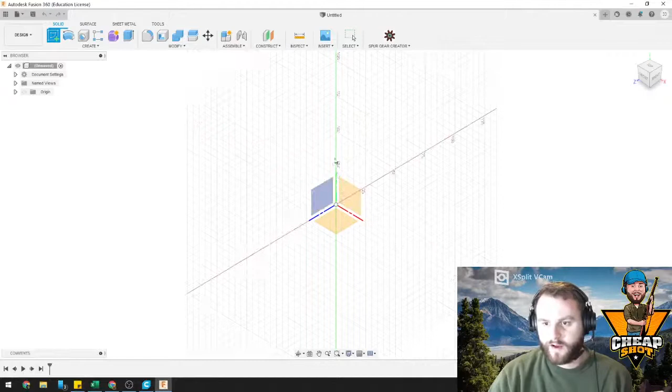Everything kind of works here in this sketch plane. So let's do something real simple. Let's say we want to make a cotter pin. We're always going to start with create a sketch, and then select what plane we want to do it on. We can do it on a vertical plane or a horizontal plane. We'll just do this face right here.

The tool we're going to use for making this cotter pin, I think we'll use the Revolve tool. There's a couple different ways we can do it, so we'll show two. The first way is the revolve way. Let's pretend like we're looking at it sliced in half. We can come up here and basically revolve it around this green line, sketching a plane and bringing it all the way around.

How that would work is we can come here at the bottom. Let's say I want the head to be 24 millimeters thick. For this one we need 12, because we're going to go around to the other side. And we'll say we want it 5 millimeters thick. We can do this using a square tool. There's a couple different ways we can do it.

How big do we want the shaft? We can have 12 millimeters back in. Let's say we want the shaft 5 millimeters thick. Remember we want to go minus 2.5. We want to be a little bit bigger than that, so let's say it's going to be 10.

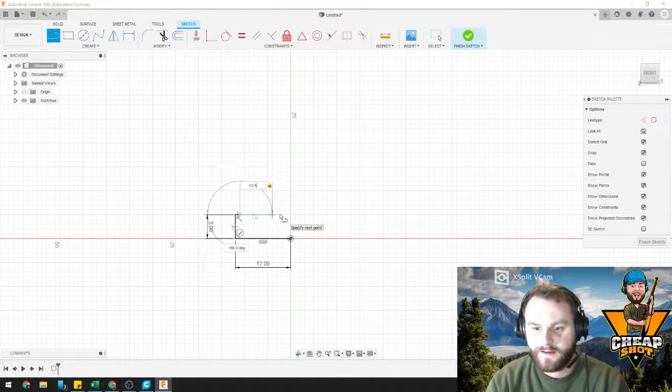And then we can bring up our total length of how we want our shaft to be. We can come back in — I don't know what that is, must be an update — and we can come back in and connect everything back up again.

So then here we have this L shape. What do we do with this L shape? We're going to come over here to create. We are going to do a — where's it at? Revolve, can't find it... Revolve. And it's going to have us select a profile. We already selected that, so it's enabled. If it didn't, we could select up here to profile and select that shape.

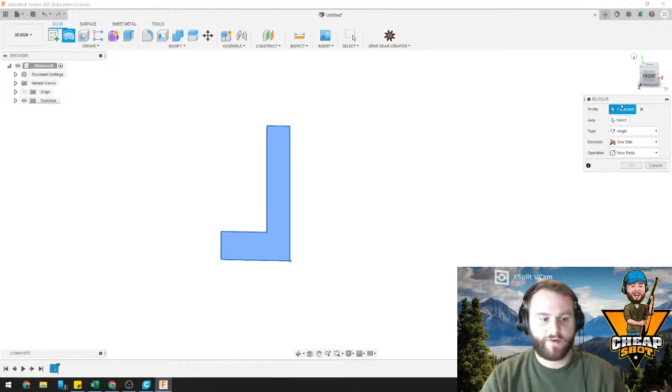But it's going to be the axis of which we want to revolve it around, and remember, we did it right on that green axis. So we can click this point right here, and it'll file it around just like that. Hit OK, and there's our cotter pin.

Now there's another way we could have done that too. Here on this bottom base, we could have used this circle tool, and we could have made the head of our pin — that could have been done too. And then we could have extruded that up 5.

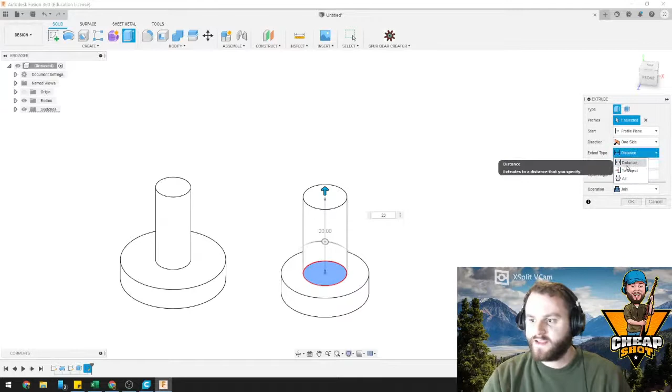And then on the top of that, we could have done another point, and we could have extruded that all the way up as well. That would have been perfectly fine. We could come up 20, however high we want. We could extend to an object, and we can set it to that plane so it's the same height. We can do all that.

But it's just two different ways to skin a horse and make the same object. Just two different ways. Depending on how you're designing it, the etiquette will determine which would be the best way to do it. For most of us, it doesn't really matter.

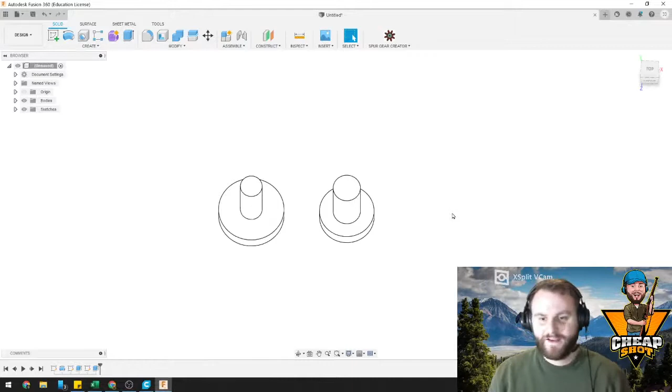You can do more extensive shapes — a family member of my fiancé sent me, a guy had made a lightsaber. So one thing we can do if we're making a lightsaber is have the base of what we want it to be. So this will be 20 millimeters thick. And then you can really just kind of freeform it. You could come in and make all sorts of shapes if you wanted.

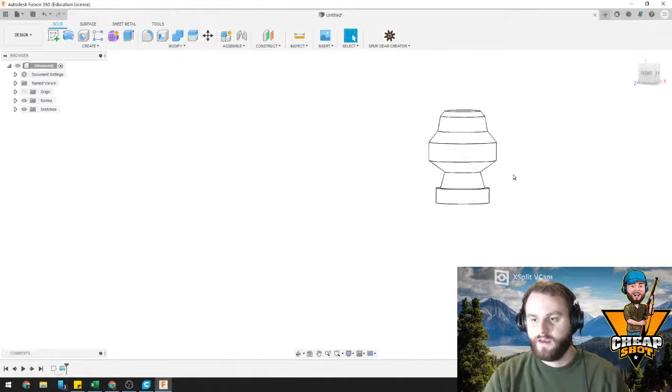Make whatever you want, and that could be his lightsaber, if that's what he wanted to design his handle with. It would just be the same thing — we can revolve that all the way around. So let's say he did want this to be his lightsaber. It's kind of ugly, but you know what, it works. Sometimes they've got little buttons on it.

So how would we get the buttons? Well, we need to make a new plane to draw on. We can either draw on a face or draw on a plane. Now, we can't draw on these planes because they're round — it doesn't really work. But what we can do is construct an offset plane, and I'll show you this.

We can do a mid plane. There's all different ways we can do it. So we're just going to do an offset plane, and we're just going to offset it from this one a little bit. It doesn't really matter — there are other ways we can do that.

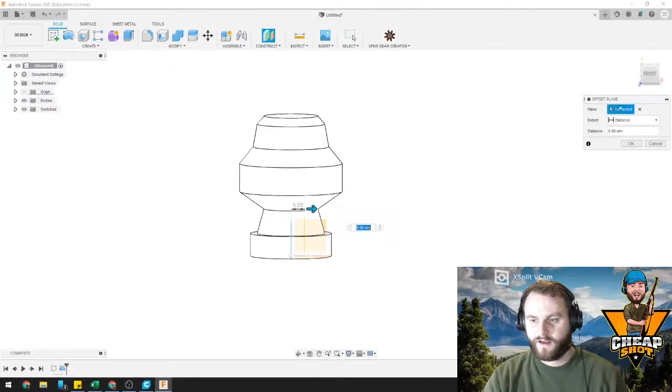We'll kind of bring it in. We don't even need to do an offset plane to make this square. We can actually just sketch right on this face, and we're technically in the model. We are inside the model, and we can do our little square for our buttons.

You can see that square is actually inside, but that doesn't change anything. We can still come down here and click that, and we can extrude it out.

See right here how it's automatically assuming that we want to cut that. So if I were to hit OK, we could see right in it. We don't want to do a cut. We want to edit this feature, and we want to do a join.

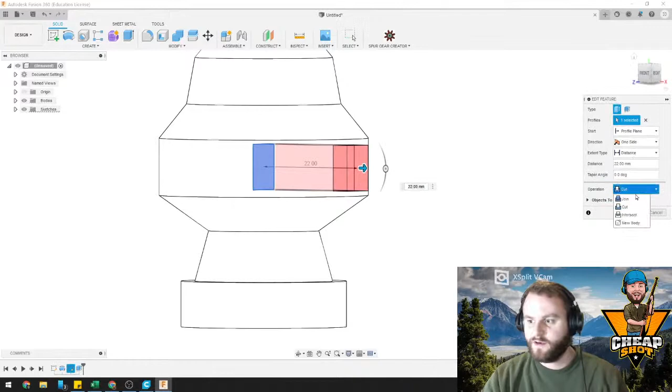So it just comes out and makes a little toggle switch for our buttons, where we can add some buttons of random sizes and whatnot.

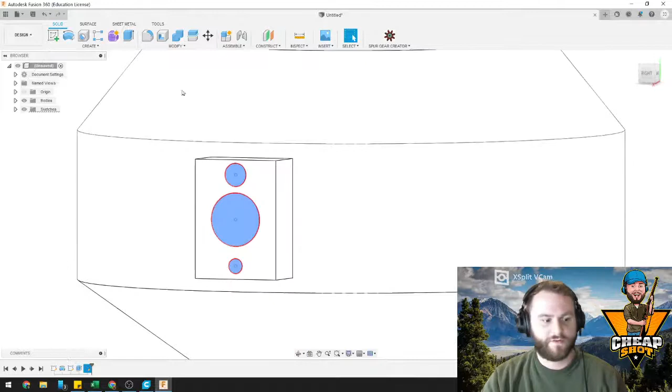Maybe we'll get some practice items and see if we can make that. Let's do a practice item. So we'll just get rid of all this.

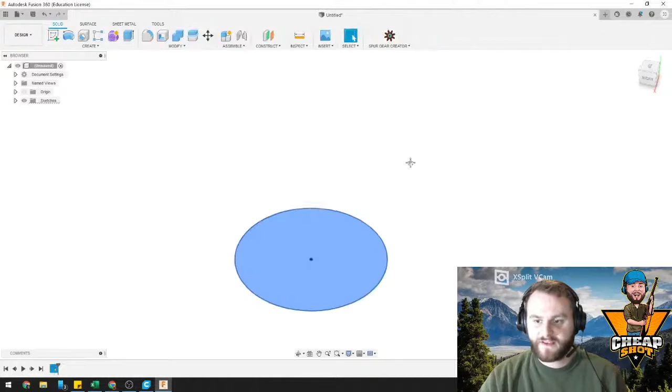So we have our circle. Let's go ahead and make this the size that we want. How thick do we want this base plate to be? We'll say 5 millimeters. That works fine.

We can come over here in the circle and use our circle tool, 2-point circle, to pick an area and decide how we want our Mickey Mouse ears to come off of it. So we'll say 15, and we'll hit OK. And then we'll take and extrude that.

Distance to object—we could do the distance. We know it's 5, but we want to do proper etiquette, so we can do that right there. And we can make our Mickey Mouse ears.

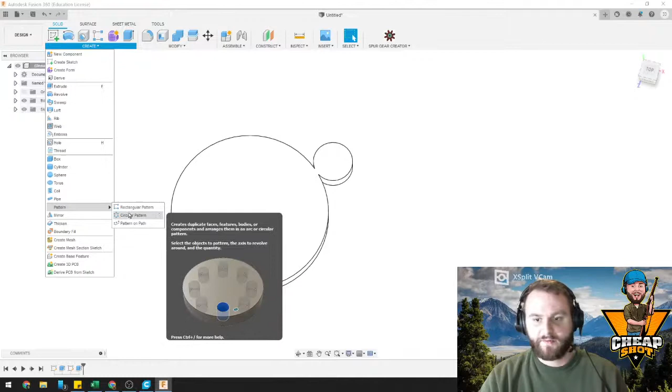So we want this in 4 different locations. We could have measured and used construction lines, going all the way around to make those 4 different locations, but we're going to use a pattern tool, a circular pattern. The object we want to bring down is this extrusion, or this sketch, either or. We'll actually go back and just do the sketch.

How about that? So we want to create a circular pattern, maybe it's not going to let us do that. We'll just bring that back up to object, and we'll pattern, circular pattern.

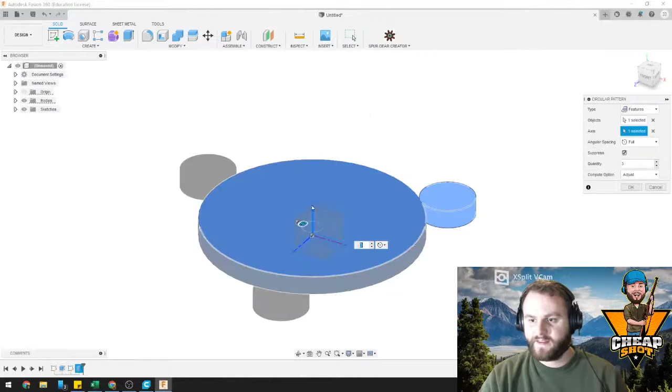So we have our object selected, our axis is going to be this line, and boom, it made 3 little dots. So we want to have 4. We can do that just like that, hit OK, and then evenly distribute those out.

Now, if we were to manufacture this, those are not going to hold up very well. So we can use a fillet to come in here in this corner, and we can do it on this side too, to give it some beefiness and have it connect a little bit. We can bring that all the way out, no matter how much we want it. We can make it a thick, chunky boy.

Let's say, can we make it 50? And we can hit OK. But that only did it to 1. We can do the same thing, we can hit that fillet.

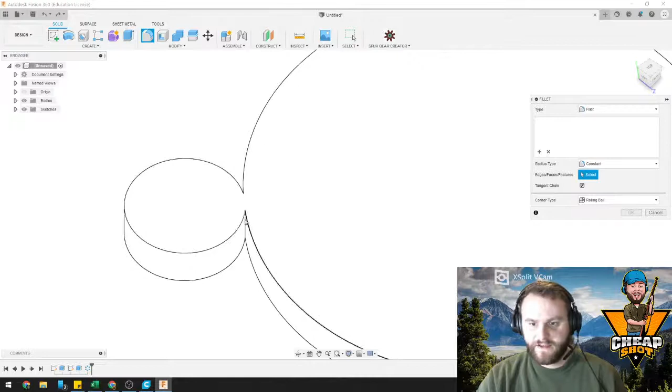We can circular pattern that as well, right around. We want 4 of those. Compute failed, that's fine. It didn't like that, but we can easily, it might take a little bit longer, come in and select all of these lines.

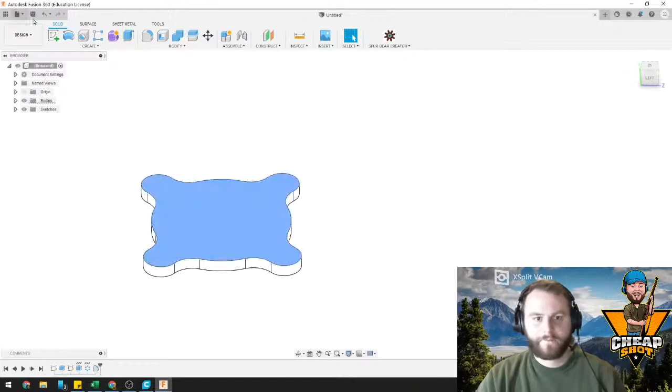And we can make that thick, and see how I'll do it for all of them. Hit OK, and then boom, then we got that. So let's make sure we get some mounting holes going on.

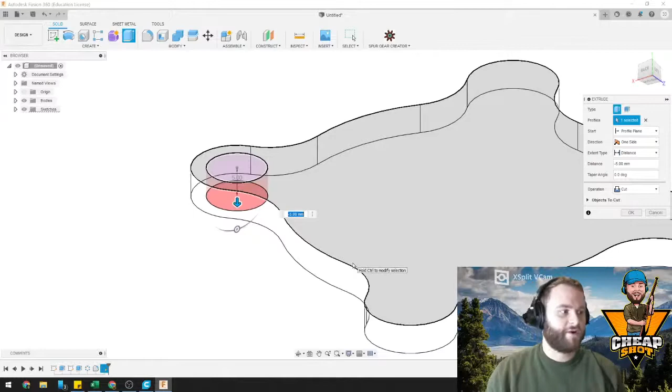This little triangle is telling me I'm in the center of that, and this is telling me I'm in the center of that circle we did before. So we'll do 10, we'll drop it down. We know this is 5 millimeters, but once again, to object, we'll go down to there. That way, if we ever go back and change that thickness, that hole will change as well. And we will hit OK.

Same thing we did before. If you're noticing a trend, we are going to circular pattern this around the axis 4 times, and boom, now we got a little mounting plate.

Yeah, it's pretty crazy. Someone sent me a file the other day in OpenSCAD, which is very coding based. So you would essentially put code in, and I don't know if you code it or if it has a user interface, but you'd put code like, hey, I want a circle starting at 0, 0, I want the radius to be this, and you literally had to type it out. It was absolutely crazy, I would never bother learning how to do that myself.

So what do we got for this? We got some things raising up, maybe to push in a bearing. So let's do the main housing.

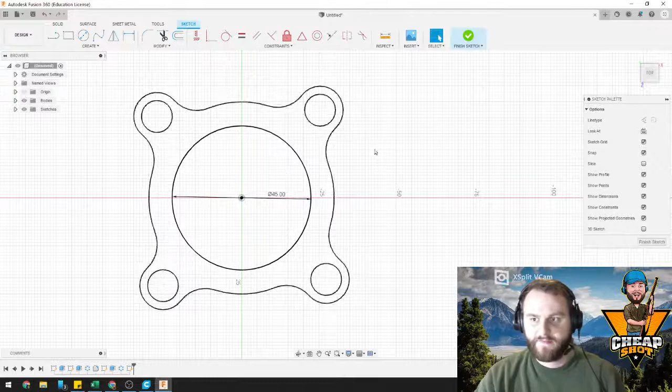We'll create a sketch on the surface, and we'll just say let's do 45. And let's say this main housing is going to come up another 5 millimeters.

One thing we can do to give it some strength is use that fillet tool right there on that curve, and make it fillet out a little bit in that curve. If you're 3D printing, just remember that 3D printing doesn't like to do fillet curves in the Z direction. So if you're doing it in the X or Y, it's great, but not the Z.

So if we were going to 3D print this, we would actually want to use a chamfer tool, and that would be just a little bit better. So hit that chamfer right there, and it'll be able to print that a lot better.

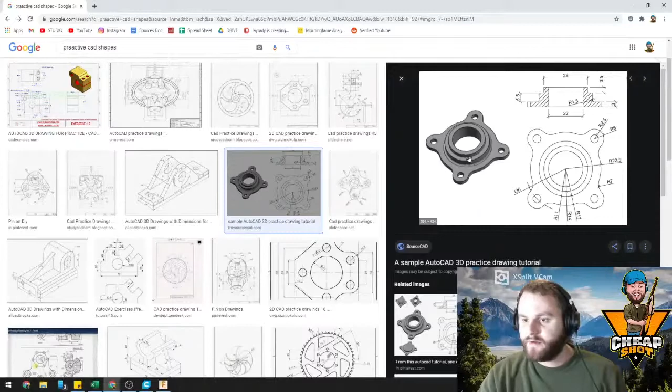So looking at the part, it looks like it raises up just a little bit more from there, and then a big hole down the side.

So once again, we can sketch on this plane. Let's take and raise it up just a little bit, another 5. And now we want to make the hole all the way down through it.

Now we have a few options for how we want to make that hole. We can sketch on the surface, get our circle tool just like we have been using, and come out to the distance, which is 40. And we can do 40 minus 2 if we want it 2 millimeters thick.

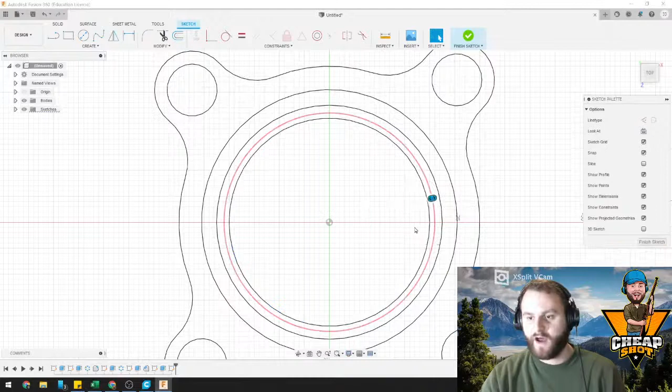Another thing we can do, and this will be beneficial if you have a CAD of something you're already using and want to make an attachment for it, is called the offset. So we're on this plane right here. I can click this line, right click, come to sketch and offset, and offset this exact geometry however I want. So if I want it 2 millimeters smaller, I just hit -2 and it'll make it 2 millimeters smaller.

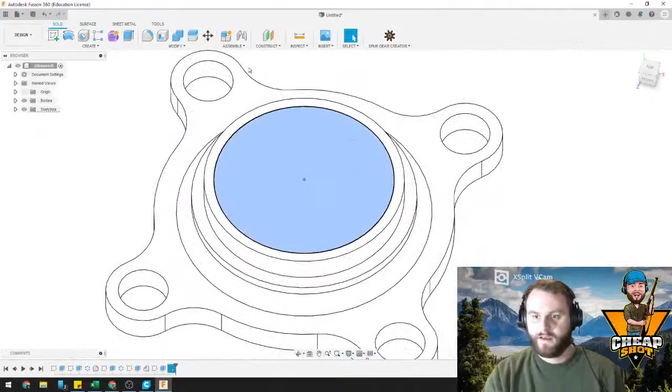I can do that with any line I really want. It's not going to do it on this one because I'm not on that plane, but I can reduplicate complicated lines. And then I could extrude this all the way down to there, and then boom, I got my bearing.

So is it exactly right? It looks like the measurements aren't right. Of course, we're not really working for that, but it looks pretty damn good. It looks pretty close in my opinion. So that looks good to me.

Is there anything else anyone would like to see, or should we move on to a different part? We'll look through my manual and see if there's anything going on.

Let's talk about this. If no one's got anything else, we're going to use a rectangular pattern tool. One thing a lot of people do when they reload is make little wood blocks to put their shells in that they've just reloaded.

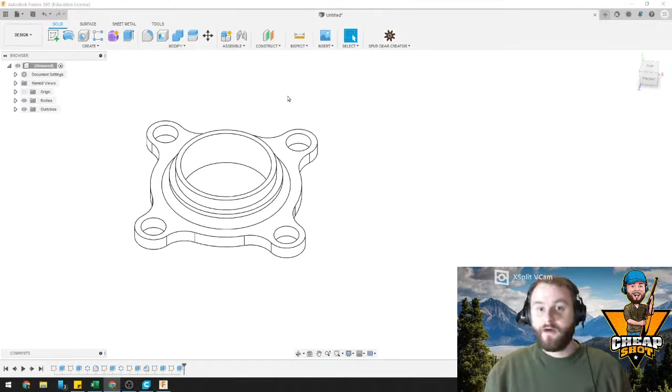If they're going to hold 100 shells, or 50 shells, they might do 10 by 5. So what if we wanted to make our own reloading block? How would we make that? Well, let's make a reloading block.

We're going to create a sketch, and then just throw out some random stuff. We'll say this reloading block is going to be 50 millimeters by 150 millimeters. It doesn't really matter, it's up to you. Dimensions don't really matter, we're just showing you how to do everything.

And we can extrude this up. Let's say we want it to be 5 millimeters thick. Let's go 10, 10 millimeters thick.

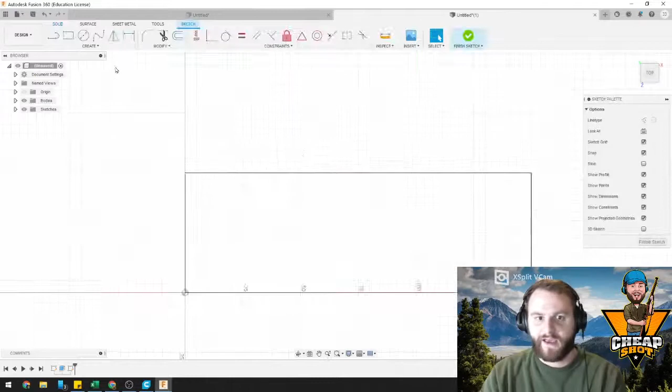So we need to make that grid where we're going to put our reloaded shells in, right? So we want to draw on this top surface, create a sketch, and let's say we have this. You have your line tool, your square tool, circle tool. If you come down to create, you have different types of tools.

One that will be good is a 2-point tangent circle, right? So we want the line tangent between this one and that one. It's going to pop it on there, which isn't really good.

But one thing we can do is learn later about construction lines. I hate working with construction lines, I just do the lines and then delete them later. So we're just going to make a grid, let's say 10 by 10.

And right here is the point where we're going to put our circle. We'll say it's 12. We can keep these lines, it's not really going to hurt anything, but I'm just going to delete them.

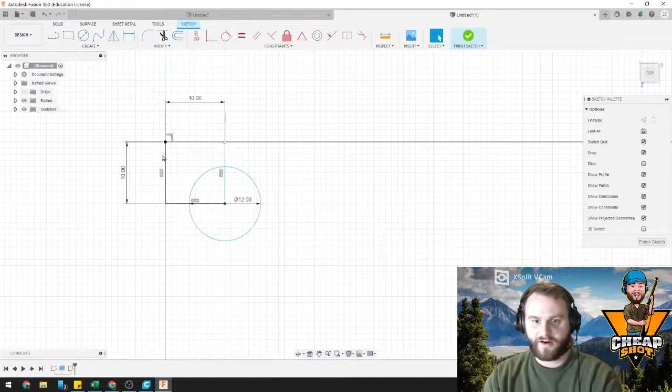I'm just clicking on them, hitting delete on my keyboard. So now we know it's equilateral distance between both sides. And we can hit finish.

And now we need to dig down to make a hole for our shell to be in. So I can take and extrude this, and I can extrude this all the way down if I wanted to. I can extrude it for infinity.

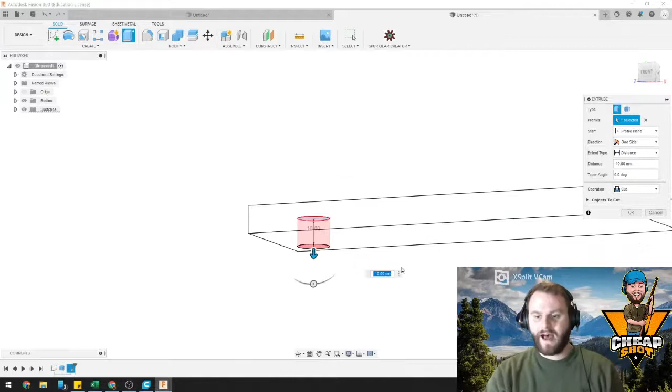But one thing we've got to remember is that if we're going to 3D print this, we need to leave a little bit of distance on the bottom to allow for material. So we're at -10, we can add 0.2 or 0.8 millimeters just so it doesn't go all the way through.

So if I change my view to see hidden edges, you'll see that line doesn't go all the way through.

So how do we duplicate this block? Well, we're going to hit that extrusion, come to create, and we're going to do a rectangular pattern. So we have our object selected, that's the object we want to do.

Now we need to select directions, and we need to tell Fusion what direction we want each thing to go. So we want it to go not only in this direction, but in that direction as well. And it's going to ask how many times do we want this.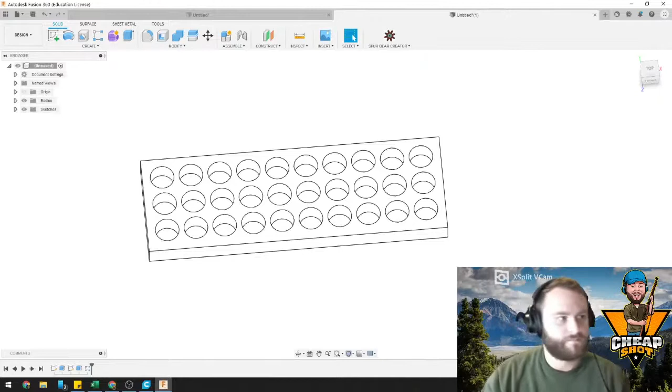So let's say I made this a little bit thicker. I think this is what Benito is talking about. Let's say I make this a little bit thicker, and I want to add an image to the back side of this. You can download an SVG.

That's a type of media file where it basically turns an image into a bunch of lines. I did this in my other tutorial, so I'll show it again, but I'm not going to show you exactly how I made that SVG. Just Google JPEG to SVG converter. That's totally fine. We can click on the surface.

We can create a sketch, and then we're going to insert our SVG. You got to find out where you saved it. I'm pretty sure I had this saved way back here. And here's an SVG file that I made before. So I can kind of move it around. I can scale it, make it smaller so it'll fit.

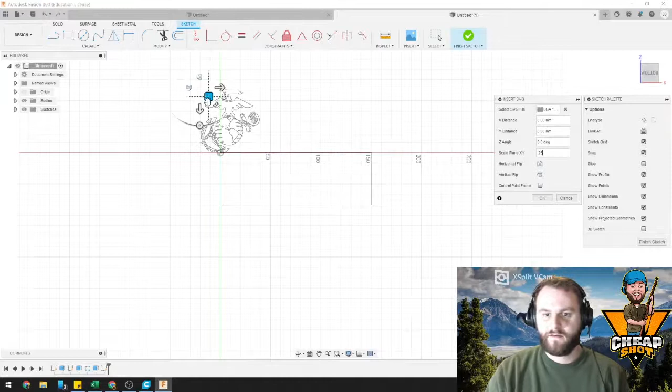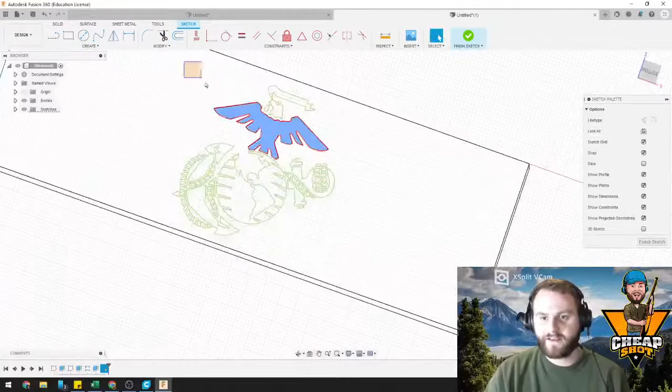Let's say I want to have this on the bottom of this object. Once I have it in place, I can select in the center and I can raise it or extrude it. Someone was telling me before I did this, I can copy and drag it. Oh, hey, and that works. That was cool. So whoever told me to do that, thank you. Basically I can take this thing and copy and drag around it.

And you can do this with any image you want. Just remember, you know what? I don't think that likes that, man. It's not going to definitely like that. Maybe he meant something else.

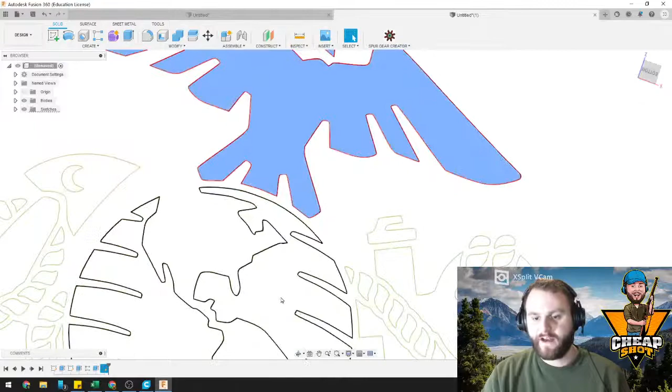But what you would do is once you have your image, you would go in and select inside all these different things, right? So I'd come in and select this, hold shift, select all these, and I would do that for everything down here. But once I have everything selected, I can extrude, and I can either have it raised up, or I could lower it, cut it in. And there I'll have an image on my print.

So that's really interesting. If you want to customize something, you can do that. It's really nice.

On here, if we were making a reloading shell, we could come over here to create a sketch. We can use our text tool. And we could say this is... you know... cheap shots.

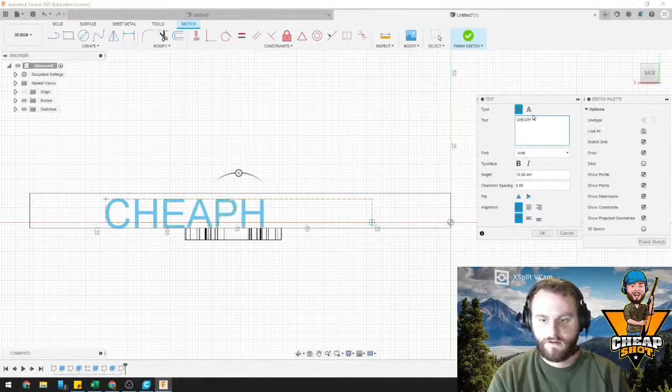And you can play around with it as much as you want. Make that 8mm a little bit smaller. You can move it around too.

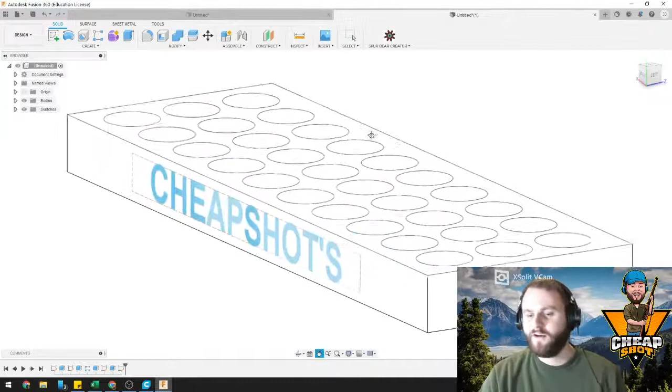But then once you have that text in place, someone was telling me too, they're like, oh, text is gone. I'm like, text isn't gone. You can extrude that out the same way. We can come all the way out. We can even come all the way in, and we can see how it cuts through all of our holes that we made. That would be horrible to make, but if that's what you wanted to do, that's what you could do. If you were to mill this, it would be horrible to mill. You'd lose that P. But for 3D printing, this would be totally fine to do.

All right. Does anyone else have any questions? Anything else you guys would like to learn about Fusion 360? What's something you can do?

Let's see if I can find another practice shape that might be good. Oh, how about this? All the time when I'm looking to do something, I want little bolts or attachments or something, and I know I could 3D print it, and I know I could design it, but I don't want to.

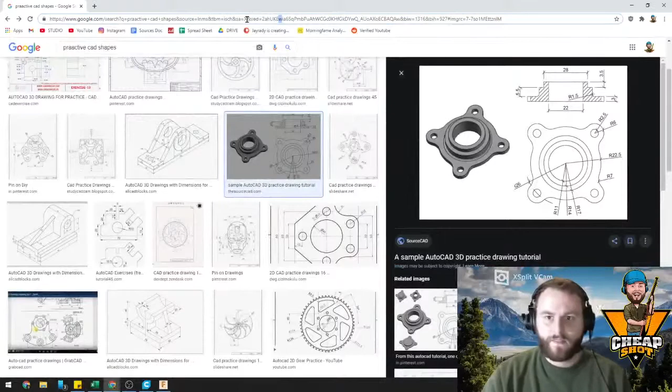McMasterCarr. You could import CAD models directly from McMaster-Carr. So you can come over here to the website, and let's just look up McMaster-Carr. Let's just find a part they got on, you know, tubings and fittings, right? Let's say you got some fuel line and you want a tubing, but you don't really want to mess around with it. You know, you can take and find these different fittings.

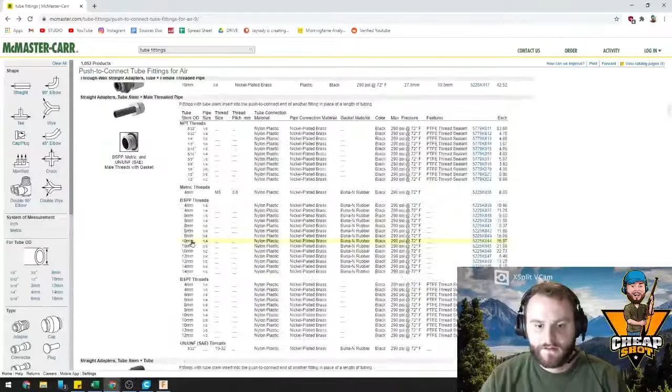I don't want to do that. I want it to be like something... like, yeah, let's say something like this. So let's say I didn't want to go out and buy this or wait for it to come from McMaster-Carr. I can load this into Fusion and then I can print it. So what I basically want to do is just take and copy this McMaster-Carr part number.

A lot of these products, I can come in and insert a McMaster-Carr component. I could have searched for that component in here, but it doesn't really work too well going backwards, so I use the website, get the part, and here's my part right here. I hit product details, come to here, and hit CAD. I want the step files.

Always do step. I don't care what you export it as or what software you're using. If you're going to send someone a file, don't send them the STL unless they specifically want the STL. Send them the step. Don't send them any other file, not the Creo or the NX or whatever file attachment it is. Step. Everything opens step. If your program doesn't open step, it's because it's janky. That's the standard. Do step. I hate it when people send me files and it's not a step file.

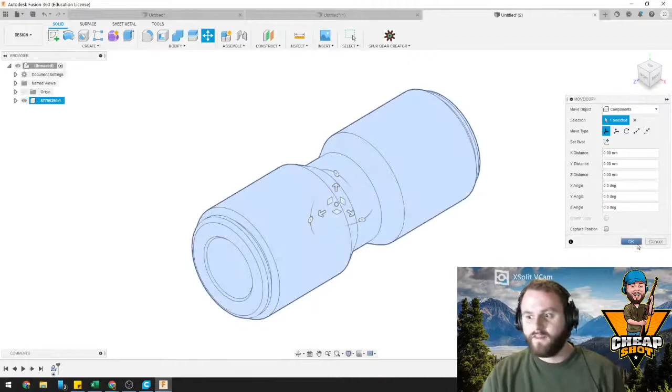Sorry, rant over. But we can take this, download it, and it'll just bring it right in, dude. And there it is, there's my part. I can send that to the 3D printer and make it, and I don't have to pay McMaster-Carr $4 for it. Now, you technically should—it's more for your drawings and whatnot. But it works, and it works fantastically, and I use it all the time. So there's McMaster-Carr, you can use that.

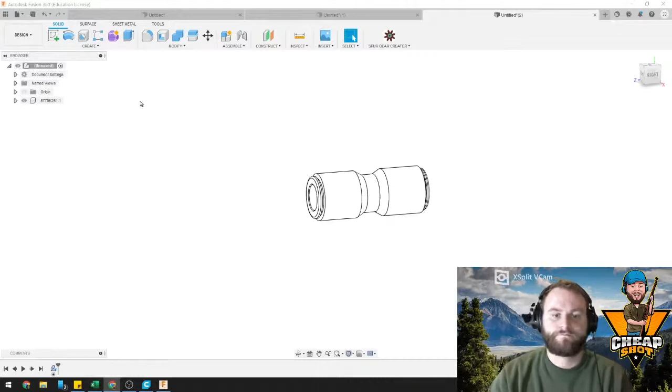So let's talk about parts real quick. Let's say we make that bolt and then we want to put somewhere for that bolt to go. This is going to be our main part, but we can make a new component—let's say we're going to have a pin, and let's say we're going to have a collar. This is great for making the pin active. We'll just come in here and make a quick pin real quick. No problem, Benito.

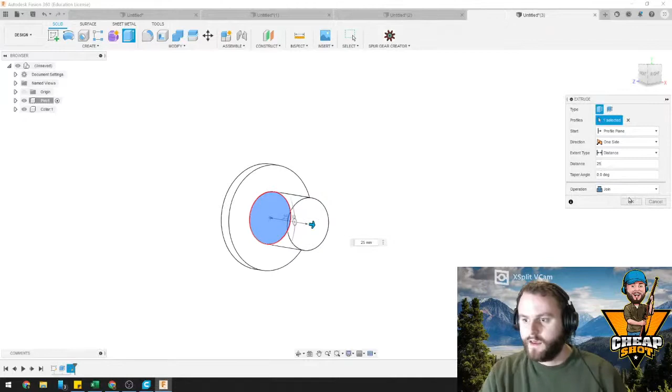And let's say we wanted to make a shaft that goes... St. Trilby asked how to go about beefing up an existing project, thicker walls around pins, etc. We're going to, the tool I'm going to use, St. Trilby, whatever your name is, I don't care—the tool I'm going to use is going to be the offset tool.

This will be perfect for you to import a model and then offset those walls because it will follow that contour. So back to what we were talking about, I can now make a collar, and that'll be a separate component. You can do this on these faces, and you can use it on that same face to beef up the walls. On this circle right here, I'm just going to right click, sketch, offset.

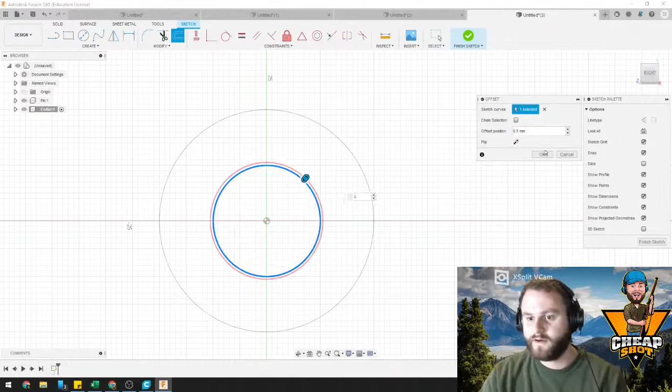That's what you can use to make those walls—offset it and extrude it. So if I was going to make this as a collar, I want to offset it 0.5 millimeters. And then I can make my collar, 0.5, you know, 30. And I can extrude this down. But we can see that these are two separate parts. So if I go back here to my total part unsaved, I'll see the two parts.

But if I just want to work on the pin, I can do that and hide the collar. I can work on the collar, I can hide the pin. Another thing is, let's say I realize this collar isn't quite where I want it to go—I can right click it and actually move it, offset it just a little bit. I can do that as well. So that's nice with the two parts.

Never used 360 or Inventor—what would you say the overall advantage of the software is compared to others? It's free. That is the advantage. It is free, and the best part about it being free is a lot of other people are going to use it. At work, we used NX. If I had a question about NX and another engineer didn't know my question, I was screwed.

When I learned on Creo, you'd have to buy the book and go through it. With Fusion, you ask Reddit, ask Google, someone's going to have that same issue. Now they have some constraints since I'm using the education license, like how many active parts you can have. That kind of sucks, but the big thing is it's free. If you have something else you enjoy using, go ahead and use that. I'm not knocking Inventor. I'm not knocking Creo... well, I am knocking Creo. I hate Creo, I hate the user interface. This is just super nice and clean. Inventor, from Autodesk, this is a watered down version, so if you have access to Inventor, just keep using it.

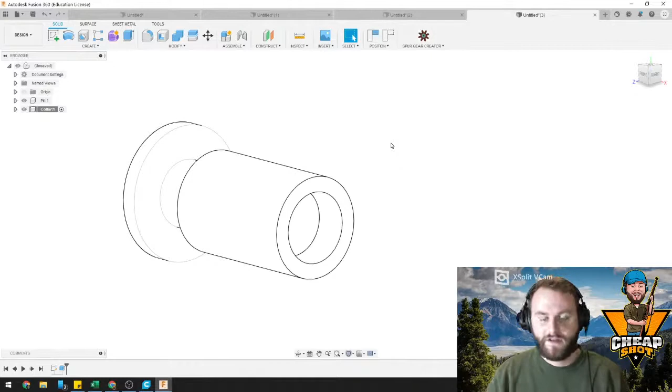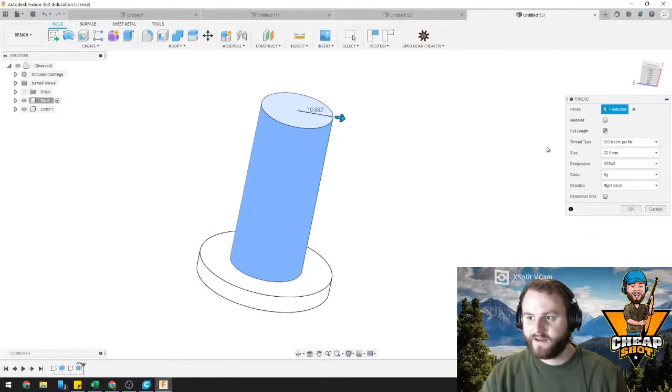If you're talking about in Fusion, it makes it pretty easy. So I can take this shaft, and if I want to thread this part on the pin, I can select this outside surface, hit create, and use this to make a thread. It'll come up with a lot of different profiles for what I want. One thing you want to do is make sure it's modeled if you actually want to see it. Then you can change your threads to exactly what you want, and hit remember. If I wanted it to thread inside of this collar, I can hit create, hit thread, and it'll do corresponding threads. You've got to remember that's corresponding when you're talking about machining. If I were 3D printing that, I'd want these slightly undersized and these slightly oversized, just to allow for tolerances. But threads make it super easy. If I wanted to show someone, you can bring that in and it'll just kind of lock in.

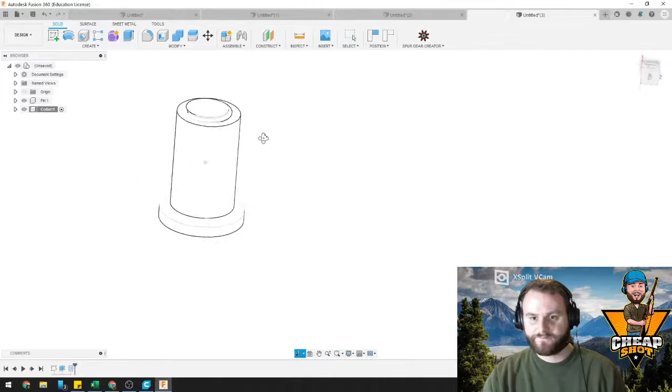What parts or accessories are easiest to start learning? If you get a book, you don't need a book, but it takes you through very simple things. I had to learn this in school. You start off with just basic shapes, and dimensions didn't really matter, it was just using the tools and the shapes. A lot of times you can find a tutorial with some weird shape and have no idea what it does, but it's basically walking you through different things. Just search something and try and make it.

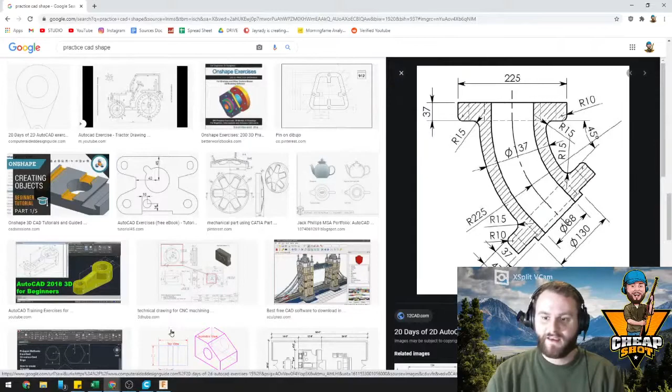Like a practice CAD shape, the dimensions don't really matter, it's just using the tools to make it. So something like this, we can make this the same way, and we can extrude it down, or revolve this. This could be used a couple different ways. It's really easy shapes like this. Just get started, just kind of get working. Maybe even measure something you have in your house and work from there, see if you can make it. There's the teapot, that's famous, it was like a visual thing and now it's become famous the world over. Look at this, he's kind of got this shape right here.

Let's talk about how, if we had a gear like that, let's make that gear. Well, I'm not saying this would be a real gear, but like a bolt face. Let's have the gear be 50, this is just very rudimentary. I actually downloaded a gear creator for a project once, it never really worked. Don't tell the professor who graded it, because he assumed it worked, although it did not.

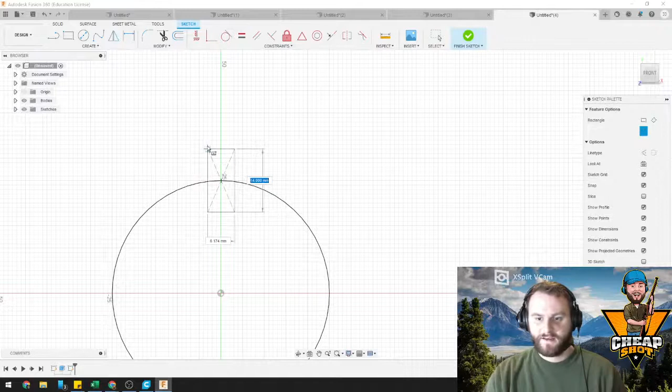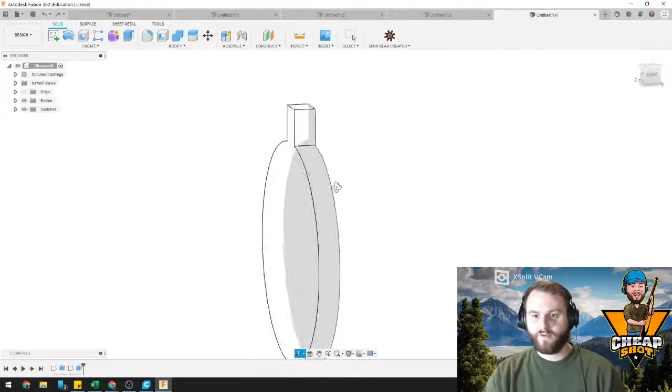For the rectangle, we use a center point rectangle just because it kind of gets both sides, and that looks right. Doesn't really matter. We can extrude this out to an object to make it the same thickness. That way, if I come in here and change the thickness... I made that original circle 5 instead. Let's say I wanted it to be 12, that came with it, versus if I had done just 5, it would not have come with it. So I can get this tool... I can get this little tooth, and I can circle pattern it all the way around.

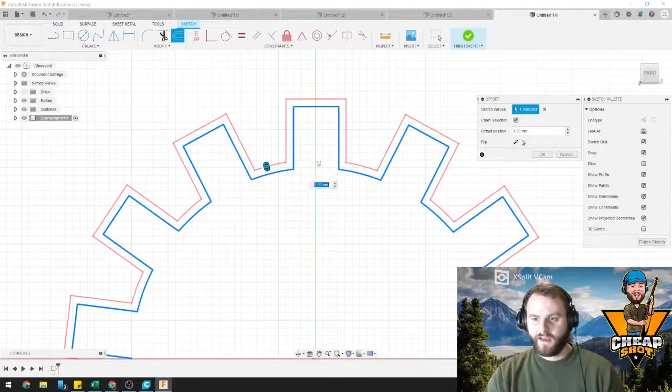So let's say I wanted to make something that would fit around this - this would need a different, new component. I can click this face, right click, sketch, offset, chain my selection, and it did it all. Now I can make an outside for it, extrude that out, and it can slide in and out of there.

That might be useful too, kind of like what we were learning before using an image - you could outline the image and do that as well.

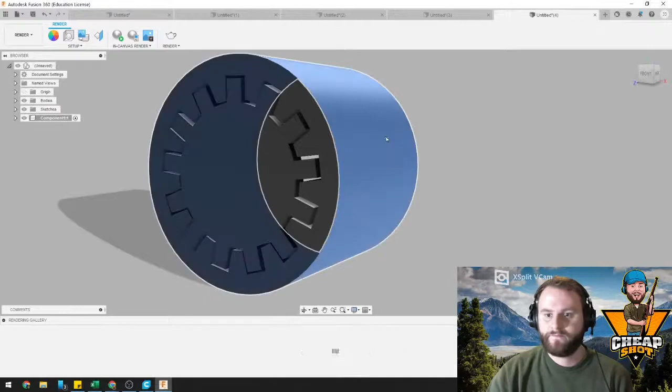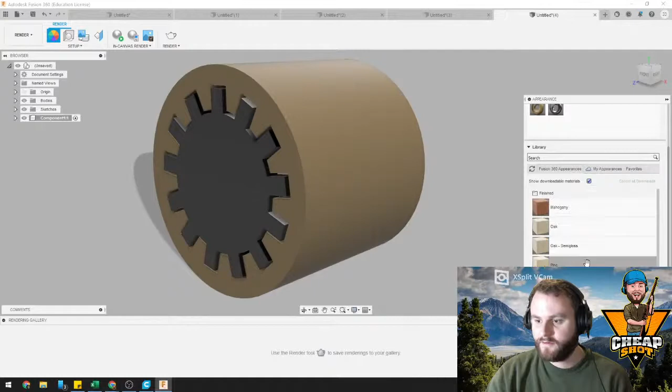You can also render it. I can say, hey, I want this part made out of wood, so let's say pine. And then I want this part to be made out of, I don't know, mahogany - that's good for showing off. It kind of comes back.

I'm using the wireframe, I really like that, but if you're using shaded you kind of see it a little bit more. You can CAD on this as well. I'm a big fan of just wireframe, I think it looks clean.

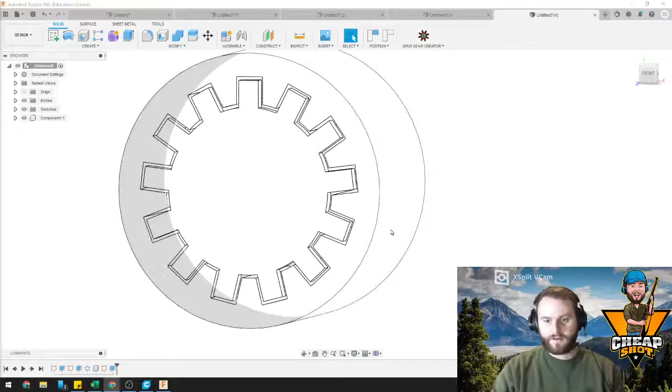I mean, you could print a gear cube in one piece and they can move without being stuck to each other. I don't really know too much about how they make that work, but let's give it a shot. Let's make it so - if you've ever seen the toy with a square with a circle in it, let's try and do that. I think that'll be a good challenge.

So let's start off with our square, and we'll just make that 100 by 100. And we will extrude that 100, so we have a 100 cubed square. And then let's take - how will we make a circle inside of it?

Well, we can hit sketch and sketch on a midplane, so that works, let's do that. We'll make a midplane between this face and that face, and let's sketch on that midplane.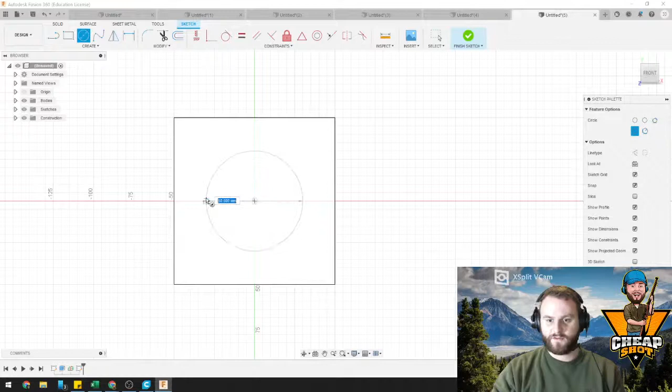I wonder if we could just do a circle. So let's say our chamber is going to be 90. I wonder if that'll work - I don't think it will, I don't think it will. This is a challenge. Can we revolve that? No, it doesn't like that.

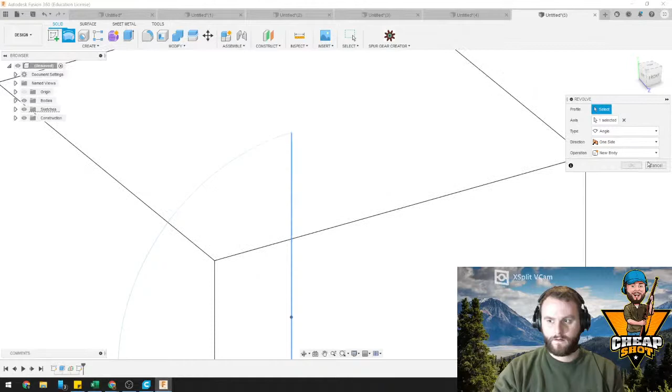So let's take and do it like this. And then we can make an arc - center point arc. Can we revolve that? No. This is a difficult one.

Why don't I extrude this? Well, basically they're making something inside of it, but using that offset function to make room where they're not going to have material. So you need to make sure your offset is thicker than any single layer line to allow your 3D printer to skip over that.

Something might also need to break off in order to support this. So if I have this cube and let's say I wanted to print this inside of another cube.

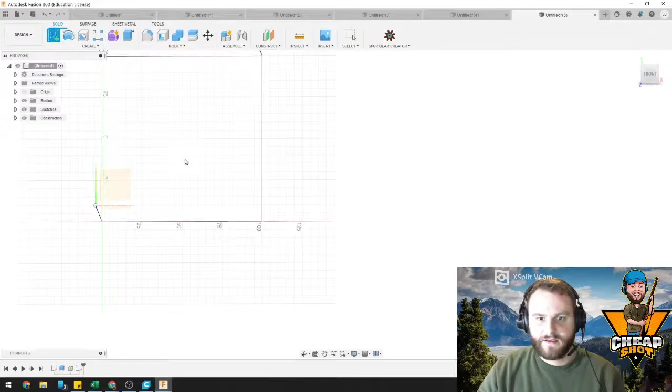So let's say I had this inside this other cube. I could print that just as is, facing like this. Of course, it's going to fail because that's going to break off.

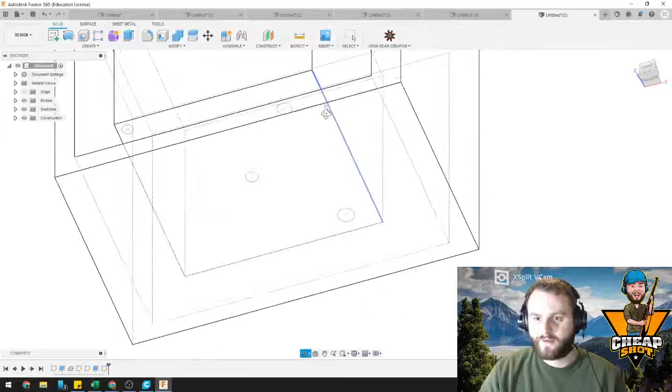But I come over here to this bottom face, and I want to make sure I see my hidden edges. You could come in and just make little circles that'll kind of break off, just to support it. Now it won't really work too well because this is flat. So if you find me a design...

Yeah, make sure you're looking. If you're looking, I look too. So let's do Thingiverse.

I thought you meant something like this, where it flexes. Oh man, no, if you're talking about one of these, like where it kind of moves around, that is above my pay scale, man. I don't think I'd be able to do that right now. I could, but it would take me a while.

Let's see if there's anything in here that looks good.

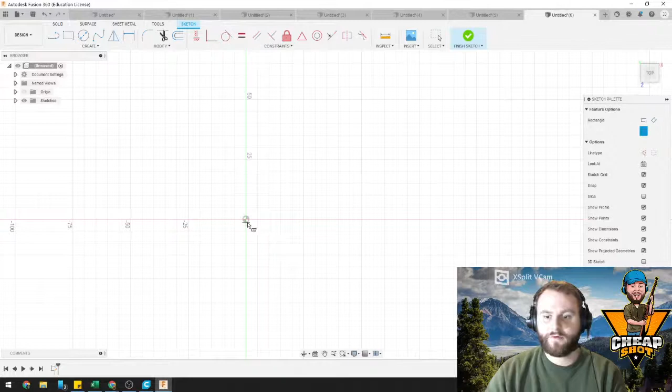You have things like lofts and sweeps. So let's say we wanted to make a vacuum attachment, right? We wanted to go from a square vacuum to a circle vacuum. That's something that a lot of people would use. So here's our square attachment.

We'd want that to be the outside. And then we can construct an offset plane. How far up do we want the adapter to be? 40. And on here, we can make our circle attachment.

One thing that we can do is come here, and it's called a loft. We can hit this profile and that profile, and it'll join them. And we can use that for making our adapter.

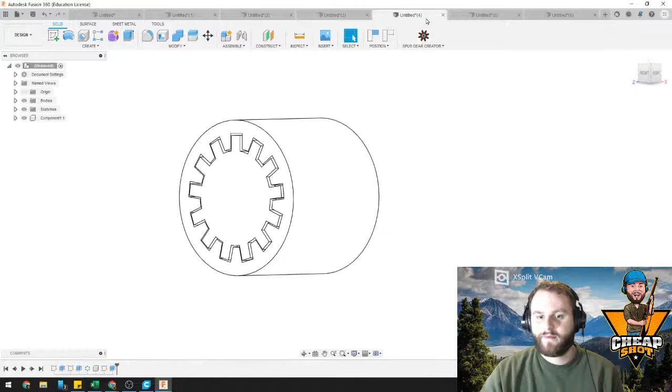I just used the gear thing as an example of manual model stuff, where a pin can rotate in a hole and be retained. So it's kind of like what we were talking about with this cotter pin, huh? You can 3D print both of these pieces.

I guess what we can do with that is undo these threads, and let's pull this collar back down. One thing we can do is see how these are even? We want to bring it so that this piece is just barely up above from the other pin.

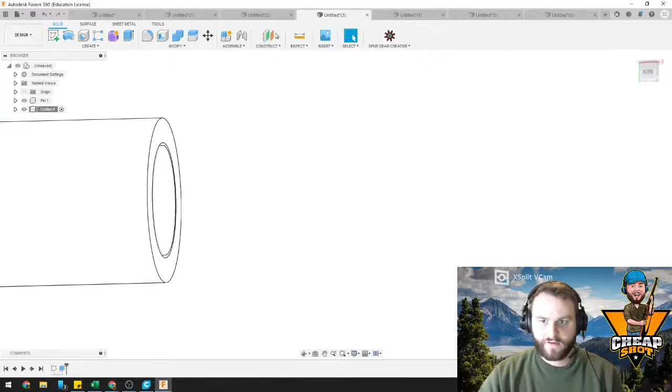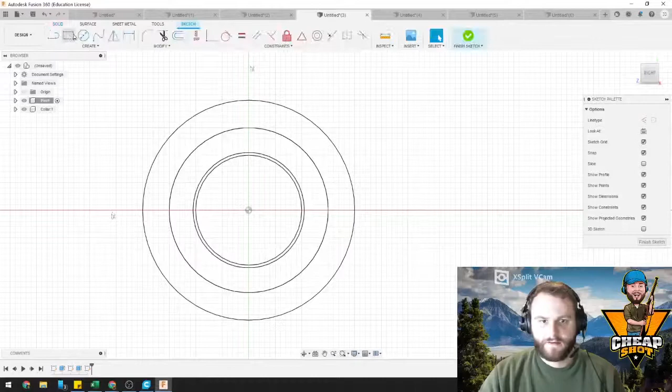Making sure I have my pin selected - oh, I didn't carry over. But I can then make a new end cap. And then I want to extend this to object. Oh, it disappeared.

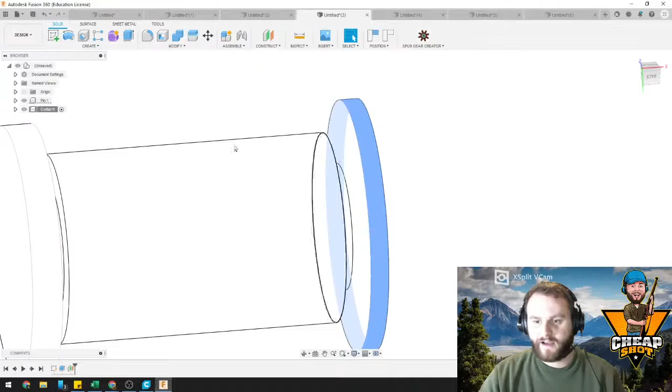Basically I would extend that pin all the way over, and I can take and move these as well. You just want to make sure that it's separated by a width greater than your layer line. Now it's still going to be tricky - it's going to take a lot of trial and error.

Another thing that would probably be better would be just to print it in 2 different pieces, and then you can glue it. That'll work. But unless you have a need to print this in 2 separate pieces, it's not really worth it. And I messed up because I didn't do this right. But it's not really worth it - you'd rather just glue it.